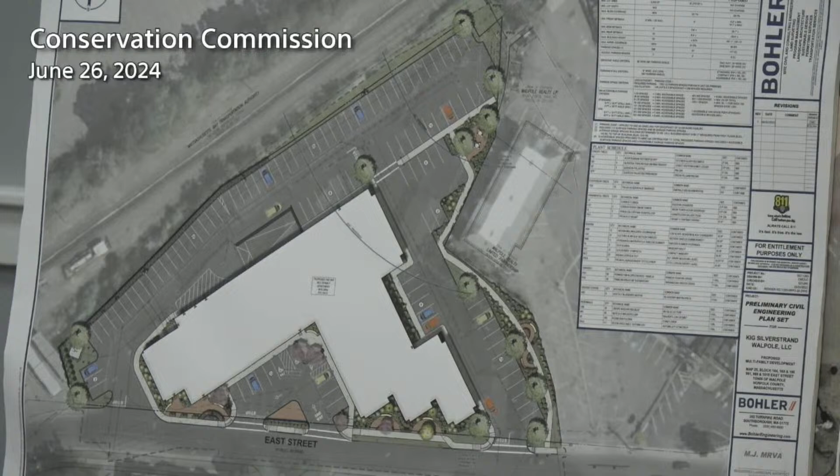Obviously, all the associated amenities go along with it, the parking, stormwater, all those things that would go along with a site plan like this. The stormwater system, it's notable that through the 40B process, it was peer-reviewed by multiple third-party engineers, Tetra Tech, who reviewed most of the civil components in the stormwater.

So we've responded to all their comments, revised, resubmitted, and the plans before you are the final, approved plans through the comprehensive permit. The stormwater is very closely looked at, but the high points of the stormwater system itself are that we're significantly decreasing the stormwater runoff rates and increasing the infiltration through this project.

Under existing conditions, the stormwater is collected through a catch basin and just outlets directly to the brook. There's no infiltration, it goes untreated. Under proposed conditions, we have typical stormwater catch basins with deep sump hoods.

Prior to infiltration, we have 4 oversized infiltration units throughout the property, so we're exceeding the town's requirement for the 1-inch water quality volume, and significantly going above and beyond what's needed from the state standards relative to infiltration, naturally meeting all the stormwater quality requirements from the state's perspective.

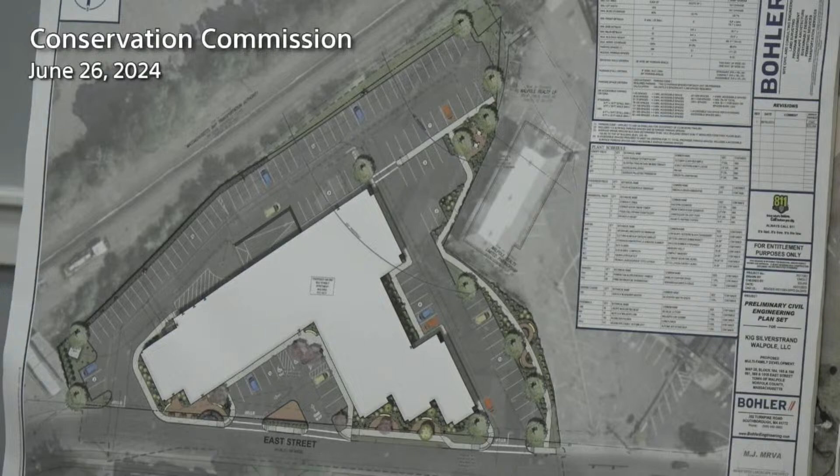That's really the high level. Obviously we're coming in under redevelopment regulations under the riverfront area, so there are certain requirements we need to meet. We failed to provide that in the notice of intent, so that was part of what DEP and the commission commented on, to provide that in the narrative. That's going to be part of our response to comments, but those requirements, we can effectively go through each one.

I don't know if you want me to go into detail, but overall, from our perspective on this redevelopment, the entirety of the riverfront area was previously disturbed or is currently degraded. The site's been around since the early 1900s, and sometime in the 1960s I believe the culvert was put in. As part of getting that built, most of that area was either filled to build up that wall and come in. The only part that's really unpaved would probably be fill from that area back then.

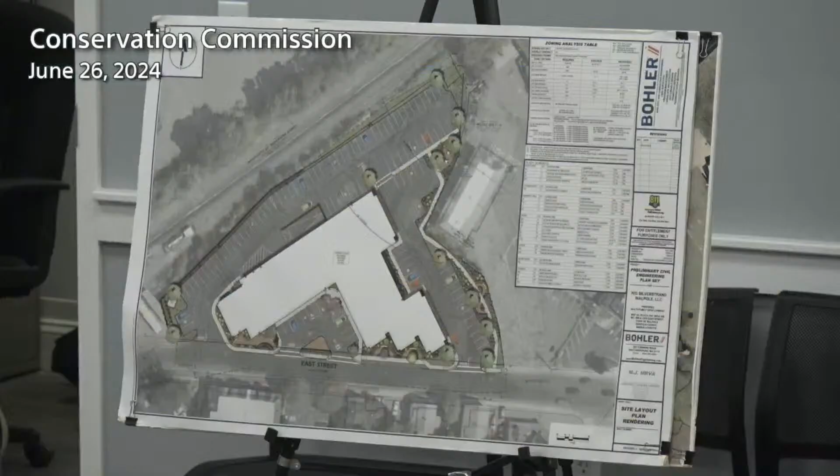It's our conclusion that it's fully degraded in the riverfront. We are providing an increase in pervious area, though only a couple hundred square feet, an additional couple hundred square feet of green space within the 100 to 0 foot of the resource area. We need to update our calculations because we provided the full area, believing the riverfront area to have been circled around. So all our calculations and reports were assuming this was the entirety of the riverfront. We need to update our calculations to reflect this, but what it will show and conclude is that there's a slight increase in green space as part of the project.

I'm sure I missed something, but I've been talking for long enough, so I'll turn it back to the chair and any questions we have.

Okay, did we have anything else here? Comments from any of the boards? No, we don't have any comments yet. Okay, we're expecting some, I'm sure Carl will submit something.

I did include in the file the Tetra Tech review letters. I've reviewed them myself, and they did review the stormwater, the infiltration units, the water quality inlet. I don't think it's necessary for the commission to peer review it, because it's already been peer reviewed by Tetra Tech. So we can just get a letter from Carl.

I would like them to address all the sections in 10.585, which is redevelopment of previously developed area, which they know they need to do. That was really my main comment. I included DEP's comment in my report.

Yeah, so your numbers will change. I was a little confused because your riverfront area on site was 23,742, but your total site was 22,900, while your alteration was 23,742. So that confused me a bit.

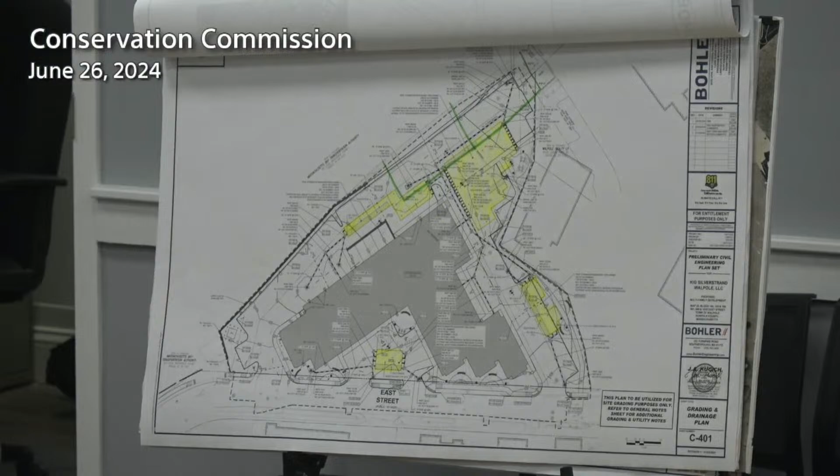Doug, did you say there's 5 or 6 infiltration basins? I believe there's 4 total. Would you mind showing them on there? I'm having a little trouble reading this on my copy. Flip to sheet C401, I don't know if you have plans in front of you. Yeah, there are large size plans too. I anticipated the comment, so I highlighted in yellow where those systems are on the site.

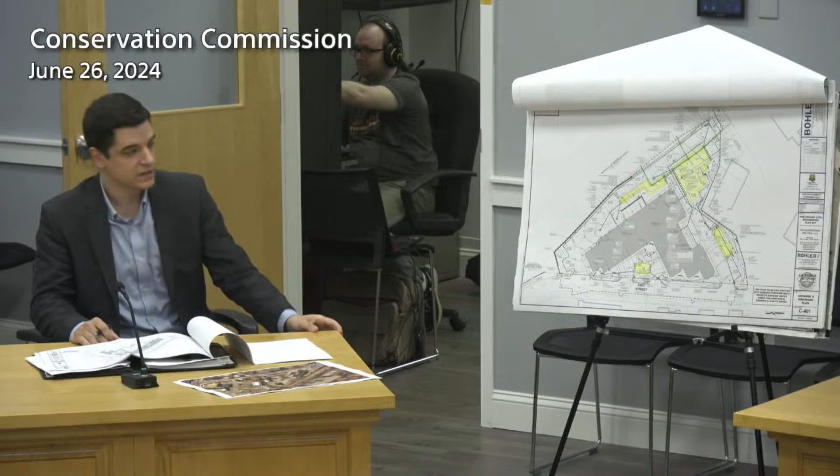And I see 12-inch PVC, high-density polyethylene piping. Does that connect the infiltration basins to each other? I don't know if I fully understand the comment, but each of the stormwater basins picks up certain areas of the property. So for instance, this one would collect the front and infiltrate on itself. Some of these are interconnected, and ultimately, if it overflowed beyond the 100-year storm, there's an existing piped connection out to the Spring Brook. It would overflow through that existing pipe.

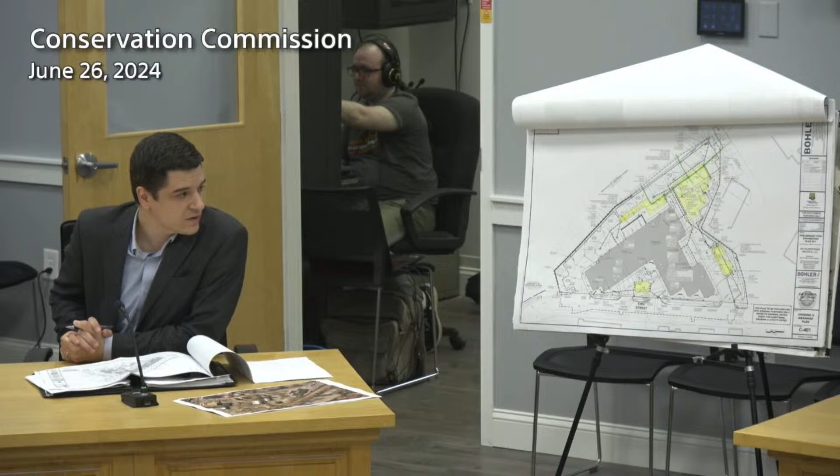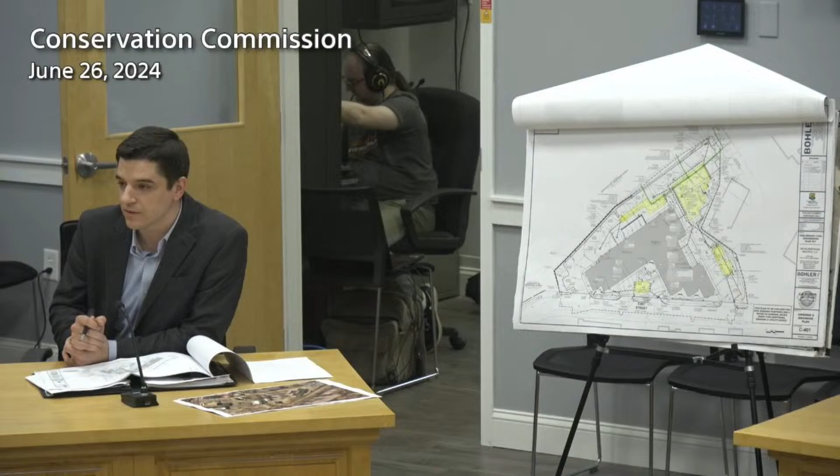And then snow removal, where would that be stored? This came up as part of the zoning board process, and I think what was agreed upon was that there's a snow management plan, but it's a narrative—if it's so many inches, or after 24 hours, it needs to be removed from the site, is my recollection, but I can come back with that information. It would be trucked away, if it gets to a point where it's in parking spaces or any issue, I can come back with that plan. I don't want to speak out of turn, but there is a plan in place.

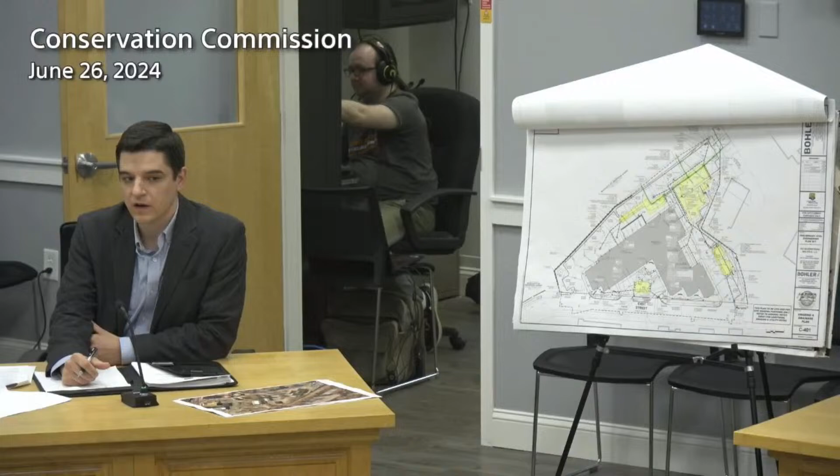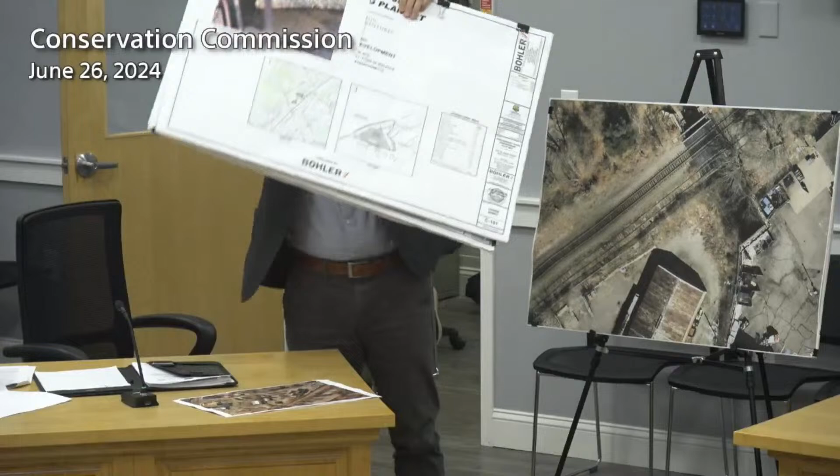Drainage right now on the site, you said it kind of stays on site right now? Still water, existing-wise? Yeah, existing, most of the site drains in, there's a couple of catch basins that eventually collect it. Most of the property kind of drains in, it's pretty much a bowl down to this point, and then there's an existing pipe connection from the catch basin out to the Spring Brook. Okay, turn this upside down on you to make it more challenging.

So it's untreated, it just goes right out? Yep. But the revised plan, your new plan, would be that it's caught on site and treated? Fully captured on site, a significant amount will be infiltrated up to the 100-year storm, so we're oversized to make sure we can infiltrate as much as possible. If anything beyond the 100-year storm makes its way out to the brook, by that point it's been treated—it's either been infiltrated, or it's just overflow. That's obviously an improvement over the existing condition. Very, very much so.

That's all I've got. Al? Well, for starters, I'd like to know how far away from this property, marked in yellow, the Neponset River is where it crosses East Street. How far away is that? I don't know that answer. Because that's where the Neponset River crosses East Street, and I want to know how far that is.

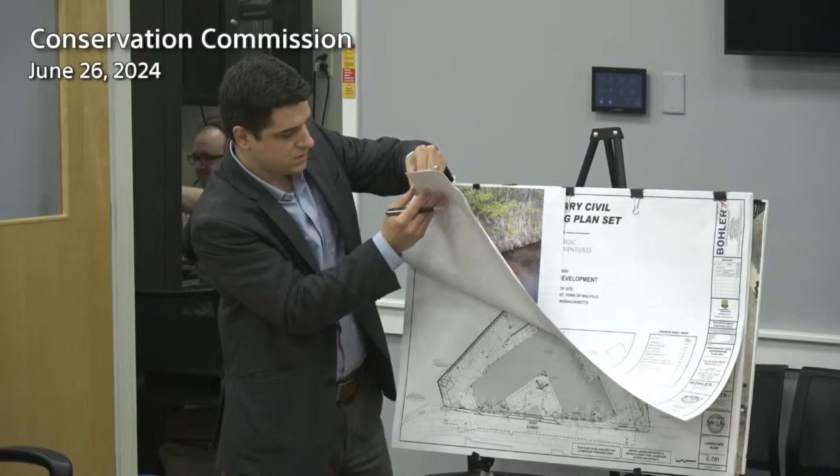What's your elevation? Have you got something that shows the elevation between that? The Springbrook comes out with a head wall and then goes into the Neponset, right? Yeah, so the grading plan has all the elevations on it. What sheet are you looking at? We're going to go to sheet C301... 501, sorry, 501.

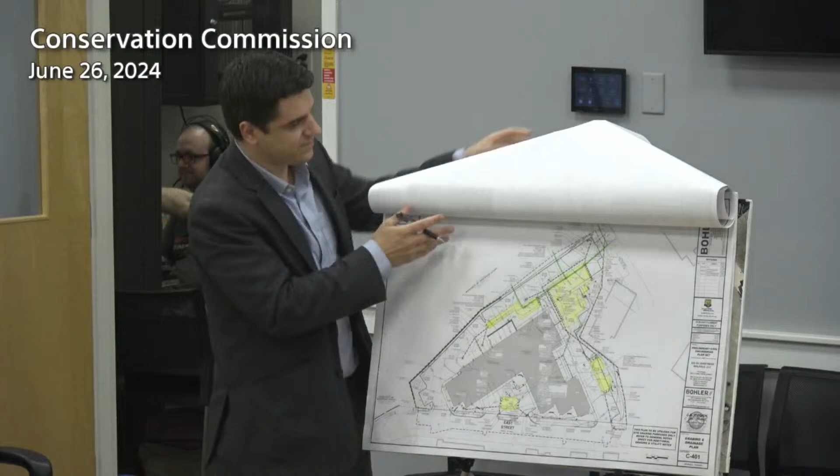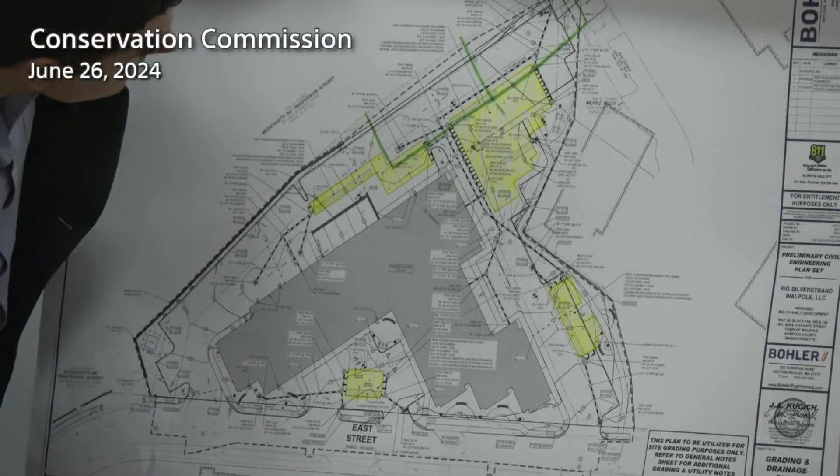Oh no, it's not, it's sheet 401. 401? Sorry, okay. So you got—those are wetland flags. We got an elevation there. Yeah, so the top of wall is about 130... it was 139, the top of wall. Where is—our site sits at 137. Where does it show that? That little triangle, the contours that stick out? I see the 140 contour. Where's your top of wall?

Top of wall and the culvert. What sheet is that? This is the existing condition plan, that would be at the very back. This is by other plan, that would be the very last sheet.

Top of wall variance between 139 and 142.

Details on the last sheet, so it's the existing conditions? 703. I thought existing conditions was one of the first sheets. What is this sheet? Lighting.

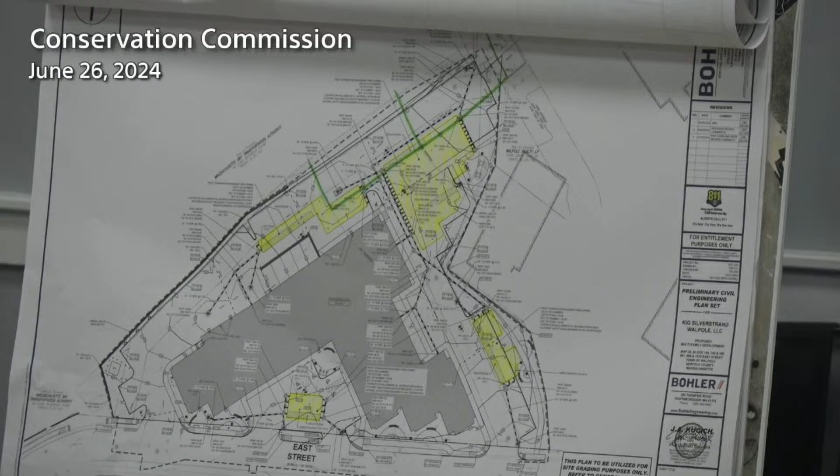Those are under, okay, correct. So if it did flood, it would make it into the catch basins and into there. Okay, all right. Anything beyond the 100-year storm would be catastrophic, and everyone's underwater at that point.

So Jack, can I just make a remark as far as what Al's saying, as far as the improvement to the riverfront area, that it may be an improvement if you move one of your landscape areas, or more landscaping, closer to the river.

So this little triangle that's closest to the river that's on your property, what is that gonna be? Is that... you have a triangular piece that kind of sticks out at the end of the property. At the end of the parking lot you have two trees, and then beyond the pavement there's just a pointy triangle area of the property.

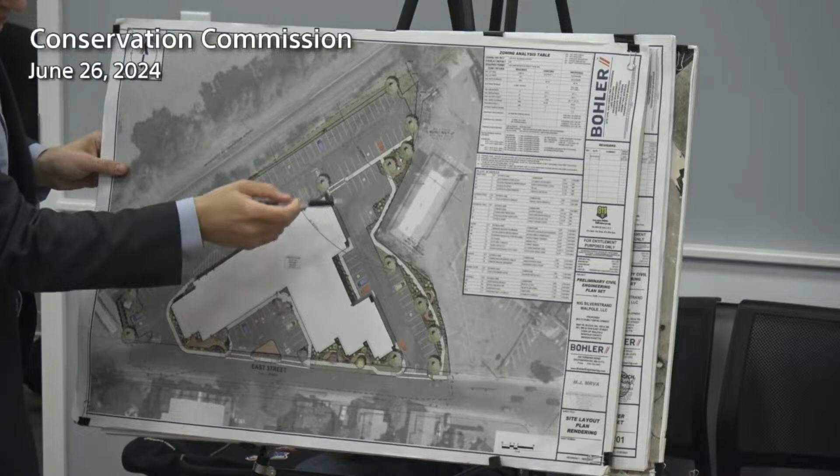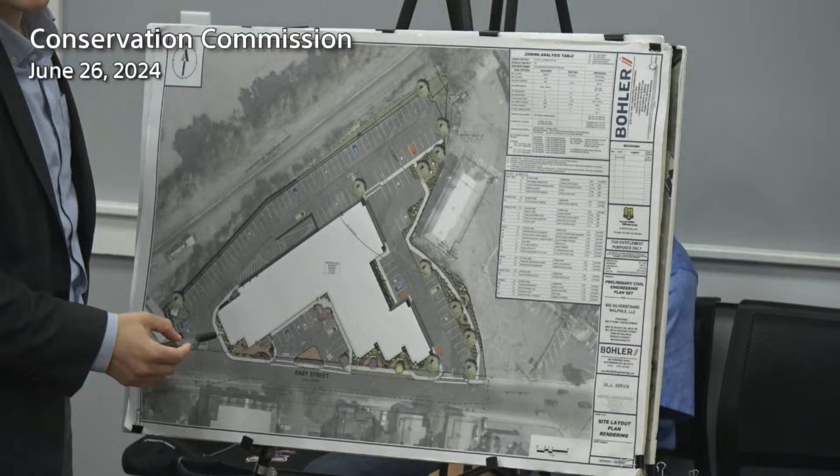So here, you have the end of your parking lot, and then there's this, and the river is here. So what is this gonna be?

So it could be that you put another couple of trees there, some more shrubs, or some kind of enhancement to the riverfront area closest to the river. I think that's a great idea.

Right now, we're not proposing to do anything, but I don't have a better photo than this. Essentially what's in here right now is, I believe, fill material from when they built the culvert and backfilled it. Over the course of 50 plus years, it just revegetated through that material. The wetland report calls out some invasive and some non-invasive species, but the client would definitely be willing to go clean that area up.

An invasive species removal is always a good thing along the river. And to do some more plantings close, at your end of the parking lot, maybe within that triangle, would be a benefit to the river.

Do you think so, Al? Al, to do more planting closer to the river, at the end of their parking area? You see where it is? Where the land is going, this triangle, right there. So that would be beneficial to have that.

We were here two weeks ago for the prior hearing, and at that time, one of the more important pieces of information we'd yet to receive were Carl's peer review comments. We have still yet to get his official letter, but Landis and I met with him the Monday following our last hearing. He gave mostly compliments, but his biggest item of concern was in regards to the fire lane that circulates the rear of the building, from the entrance from Route 1 all the way to the southeastern corner of the site.

It's going to be two-way traffic with access to the parking spaces and the garage bays, but along the rear it's going to be single-lane traffic. We have signage and striping showing that. Previously, in our original submission, in an attempt to reduce the amount of impervious surface we were generating on site, we had the fire truck movement plans, and we got to work with a 12-foot wide fire lane along the back, at its narrowest. So what we ended up doing was expanding that to 20 feet.

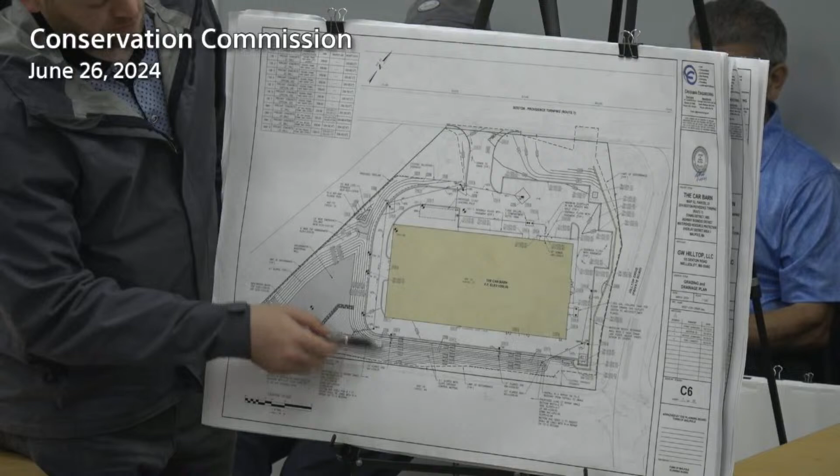We updated our fire truck turning template to provide an additional buffer and movement width adjacent to the fire truck turn. Fortunately, when we reran the calculations and analysis, we concluded that the added impervious area from widening the fire lane did not impact the pond's capacity. At the time of the original design, prior to adding that additional impervious area, we still had almost 10,000 cubic feet of excess storage during the 100-year storm event. Widening the fire lane generated about an additional 1,700 square feet of pavement along the south and southeast corners of the site, the rear, and there was still adequate separation prior to the 100-year peak ponding elevation even reaching the spillway, leaving the site.

At the last hearing, too, there were also a few other questions and comments about the plantings. I spoke with our landscape architect, and she assured me that what she proposed is drought-resistant, also very hardy plants to resist the colder temperature times of the year.

One comment that unintentionally did not get included in the revised plan set was a detail of the wall, but verbally, the applicant's committed to putting in an Allen block wall. There's definitely not going to be any riprap slope going up from the east side of the property.

I'll be over in this direction here where we're going to be doing our more significant cuts. I think it's about a 7-foot cut at its peak, where we are closest to Hilltop. We're going to be putting in an Allen block wall all along the rear here.

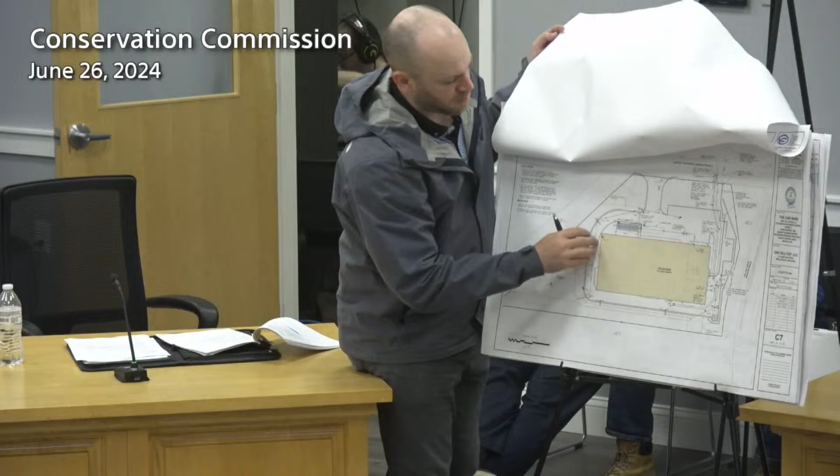Because we were able to demonstrate that we were able to retain everything on site from the proposed impervious and capture everything upstream off-site solely within this area here, we wanted to avoid the added cost of putting in an underground system elsewhere.

During the original design of the project, which kicked off almost a year ago, one of the issues we had was how can we reduce construction costs to make it feasible to the applicant? And we had initially had a much larger building and a much larger impervious footprint.

In order to mitigate stormwater effectively, we had to include an underground system in addition to the stormwater pond. And so after many iterations of shrinking the building and reducing the impervious area, we came up with this concept, and it worked. That's why we're presenting that today.

Okay, so based on the conversation with Carl and Chris, I felt like we really went over pretty much everything that was necessary. And then he had to do some slight redesigning because of the fire road, but it didn't really impact his stormwater design that much.

I think Carl just went on vacation this week, so he was probably just running around doing everything before leaving. He did indicate he was happy with the system, so I told Chris, why don't you come back and we'll go to closing the hearing and having the commission render a decision rather than continuing it again, because I don't think it's necessary. It still has to go to site plan review with the planning board, so if there's anything that needs to be tweaked and he has to come back, he can just do a revision to us.

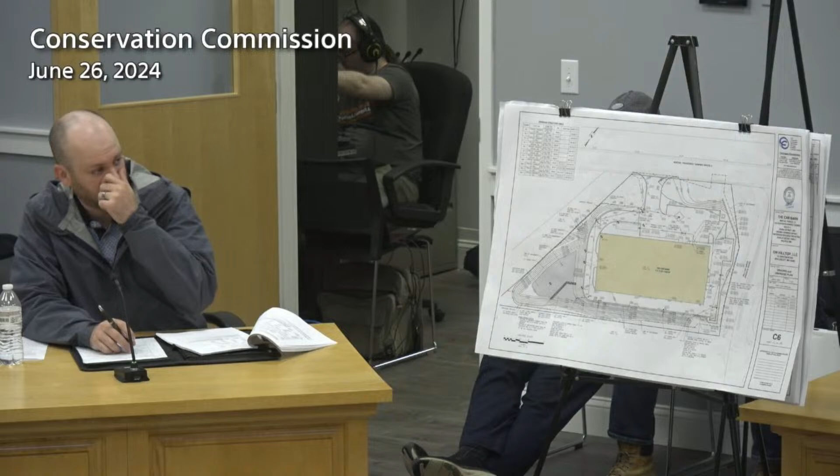Doug, any questions or comments? I think I got this figured out. The septic tank is below pavement, but the leaching field is not, correct. The proposed leaching field location is going to be in an area that's just flat grass. And we will have to submit an application to the Board of Health for the permitting of that. Yeah, that was the only thing I had.

Media? Al? I see you have the septic system is... you can't connect to the sewer?

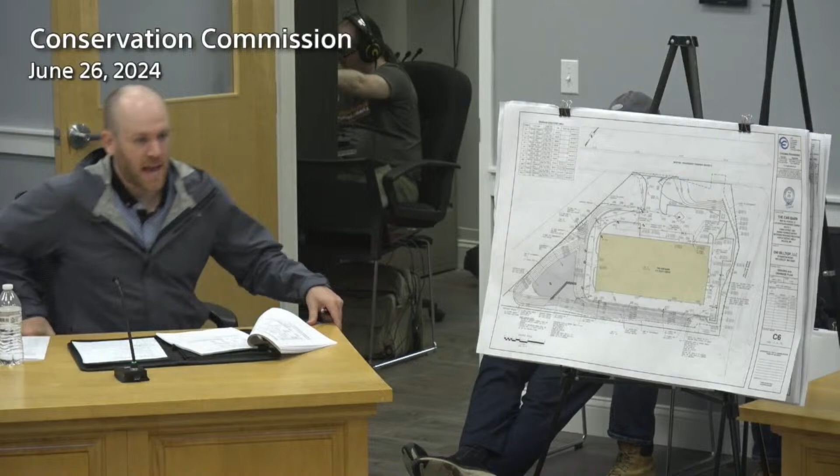So sewer is not available, but there's sewer adjacent to the site. At the northeast corner of the site, there's the intersection of Hilltop and Sunset, but the sewer system is actually a private system, so we don't have the right to connect into it. The applicant reached out to the owner at the Preserve Park, and they didn't even want to have a conversation about it with us. So here we are with the septic system, which is a lot more expensive to construct and maintain than a grinder pump and a 2-inch sewer force main going about 50 feet to the sewer right there. I think that's where the town sewer line is near there.

I think the town sewer is at the next intersection further up Route 1. The Preserve Park has its own, I think 1 or 2 of their own private sewer pump stations. So what we would pump to our site would then go into their pump station, and I think they just didn't want to entertain that at all. I'm sure the applicant was willing to pay to make that connection, but it was out of our control, unfortunately.

Okay, good. Anyone in the audience have any questions or comments, please identify yourself for the record.

Jack: what is a private sewer system? I believe it's probably collected and then pumped into the town system. So it's all retained within private property. The system itself exists solely on private property until it's pumped into the town's right of way.

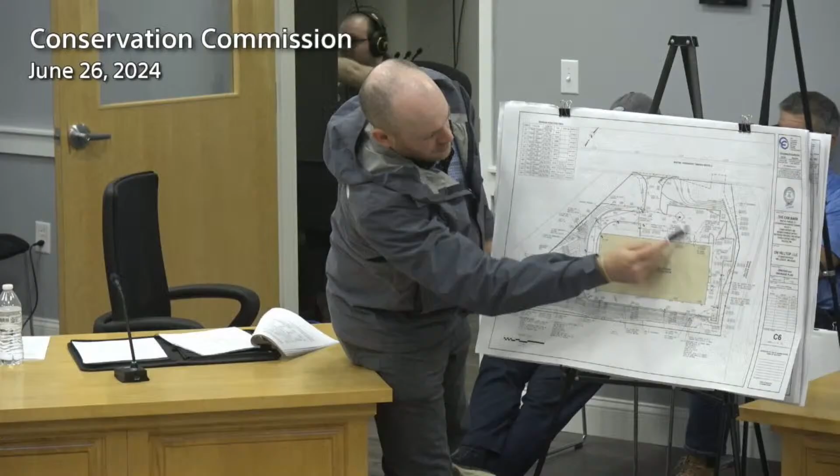No one else? Jack, go ahead, another question. So I see the 1,500-gallon septic tank on the north side, oh, this one right here? Yeah, well I'm getting to the one on the east side, there's the 1,000-gallon holding tank for floor drains on the east side, and it says it has no outlet. What happens to the water that flows in there?

So the building will have floor drains in it for when cars come in and out with snow melt. They'll be doing light hand cleaning, probably like a slop sink, a rag, and some residential grade polishing wax. So any water that drains off the car while it's inside the facility will be able to drain into the floor drains, and then by gravity fall into the holding tank, which is essentially just like a tight tank. Once the water level in the tank reaches a certain elevation, an alarm system will go off and notify the owner or operations manager that the tank needs to be pumped.

So a company would come pump it. And it's really just snow melt, water, miscellaneous—you pull into your own garage, the snow melt comes off—that kind of low volume amount of water that would enter the tank.

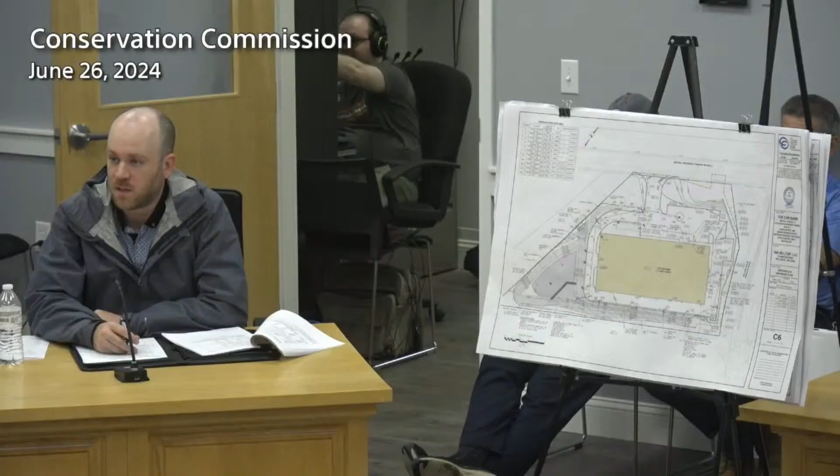So it vents to the ridge line. If they fail to pump it in time, I assume the water would come out the vent? The vent will go to the roof line, but that's not like a tank that's really going to be getting any flow from any toilets, sinks, or anything like that. It's just for washing vehicles. It's a plumbing code thing, if you have floor drains and don't have access to tie into the sewer, so unfortunately we have to tie that in.

We actually did the design and permitting of the project on the other side of Hilltop, Dry-X, and they have that same sort of configuration with the sinks and toilets connecting to the septic system, but they have floor drains that have to go into a tight tank. So across the street, very similar, identical situation.

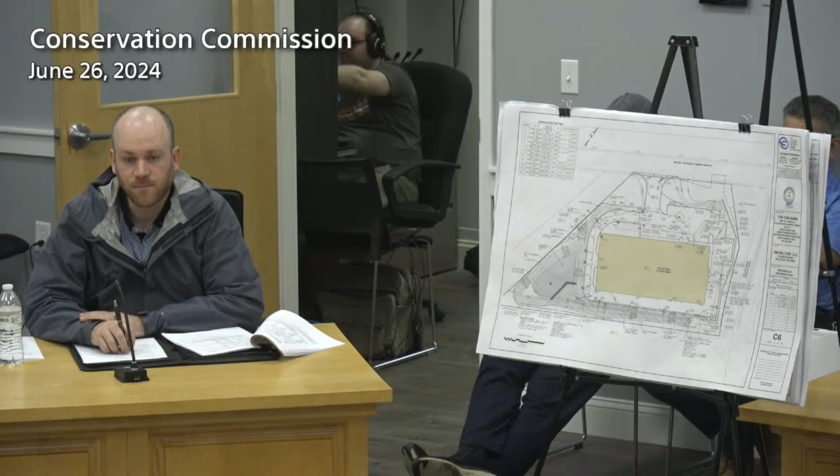Okay, someone make a motion to close the hearing? So moved. Second? All in favor? Aye. 4-0-0.

Standard conditions, yeah. I would just add to receive the detail of the wall, and the approval of the septic system anywhere. Yes.

Okay, so someone want to make that a motion as noted? So moved. Second? All in favor? Aye. 4-0-0. Thank you very much. Okay, thank you.

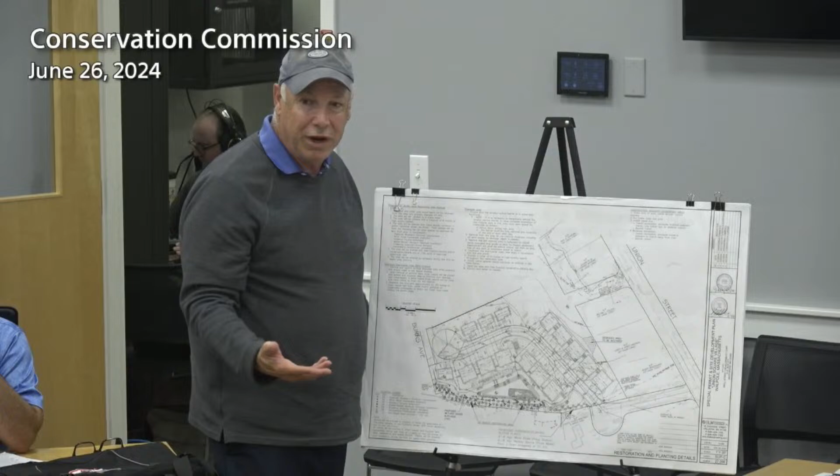So I was saying, if you wanna plant something, I would plant it somewhere in here where it's gonna be undisturbed riverfront, because right in here you're actually in somebody's backyard. But that should be undisturbed riverfront area anyway. If you go there now, you'll see these people have been dumping their branches and debris. That all has to be cleaned out.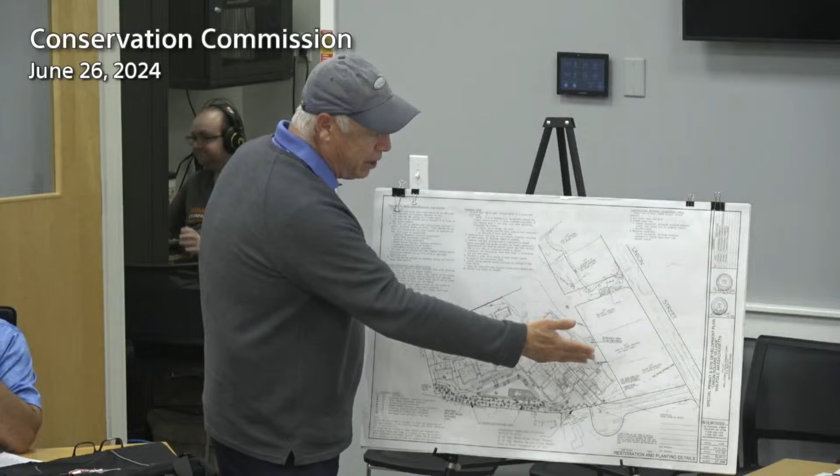I'm just making a suggestion that you may want to not put it exactly in the same place. Why don't you go look and make it the location of these shrubs.

Whatever we're calling this, a replacement shrubbery, that it be in conjunction with consultation with the agent, at the discretion of the agent. I would say place them in the same place. We can take a look at it. I think some of it might make sense elsewhere, or additional ones.

Okay, anything else, anybody? I think so. Okay, so we'll make that a motion to include that in the order. So moved. Second. All in favor? Aye. Aye.

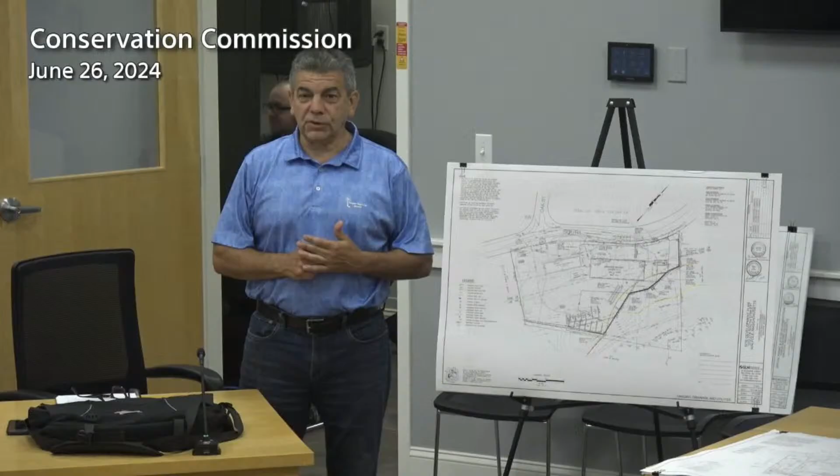I'll go over it with you. Okay, why don't you bring it forward, because you only gave me two plans. Want me to come up there? Let's bring it closer here. Yeah, if you want to share that with Al, maybe.

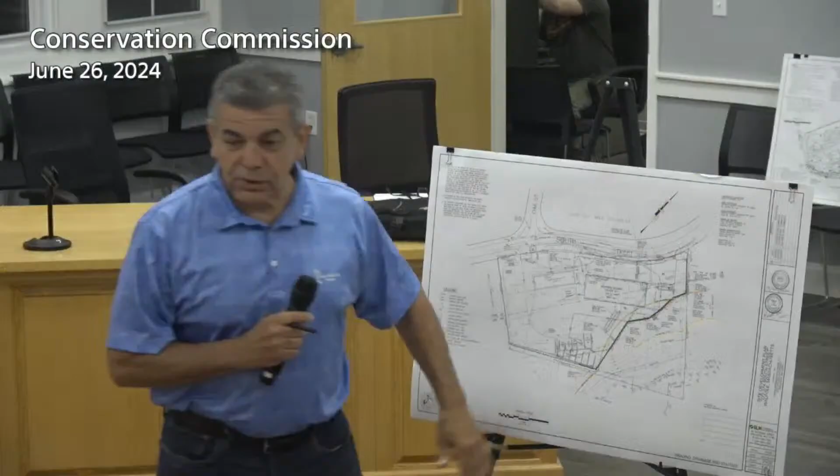What sheet are you looking at there? That's the approved plan. I have the other one, the proposed. So I'm going to go over the approved and the proposed with you, so you can see them both. I'm showing sheet 4.

Before I forget, they have to sign the order for Brookline too. Don't forget that. Hold on, first things first. Wish I had another easel. Have you identify yourself for the commission? I'm waiting for him to sign. More for the audience.

Okay, we are on TV, so yes, we need to consider the audience. Okay. So you're talking about what sheet? Sheet 4.

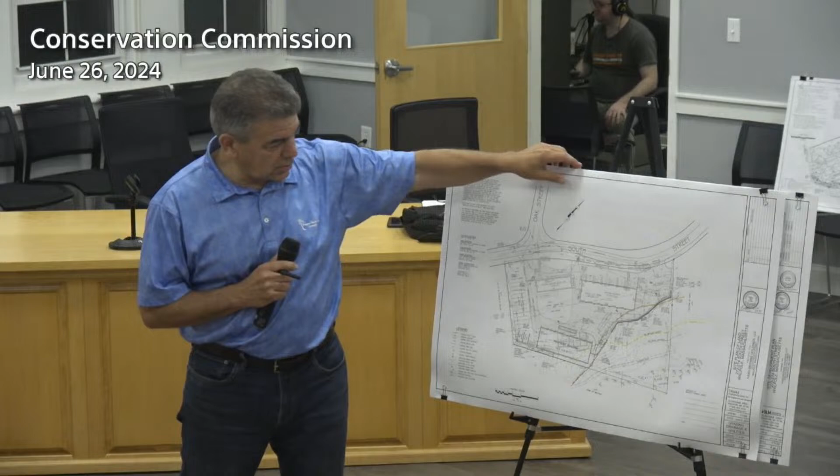For the record, Rob Truax, Truax Engineering Group. This is Ian Brown's project at 272, 274 South Street.

We have a current order of conditions to build this plan, which is the proposed building, 10,500 square feet, and some work in the parking lot. About 80-85% of this work is complete, as you know. He hasn't done the striping, but the wall is all built, the building's in, it's occupied. He hasn't done the work out back. So if you look at this plan, everything pretty much from here forward, other than the striping, is complete.

He has not redone the storage bins, so these are still sitting right here. He didn't move them back here as we proposed. So this is the limit of work. It comes down and over across the site. This is your 200-foot riparian that was on the site. This is the 100-foot wetland buffer in yellow.

So what he's proposing is a third building now. The third building's going to go right here in the back where those bins were I just pointed out. So the limit of work doesn't change. This is still the limit of work that was on the other plan. The difference is that we're putting in a building where there was pavement rather than having the bins in the parking lot.

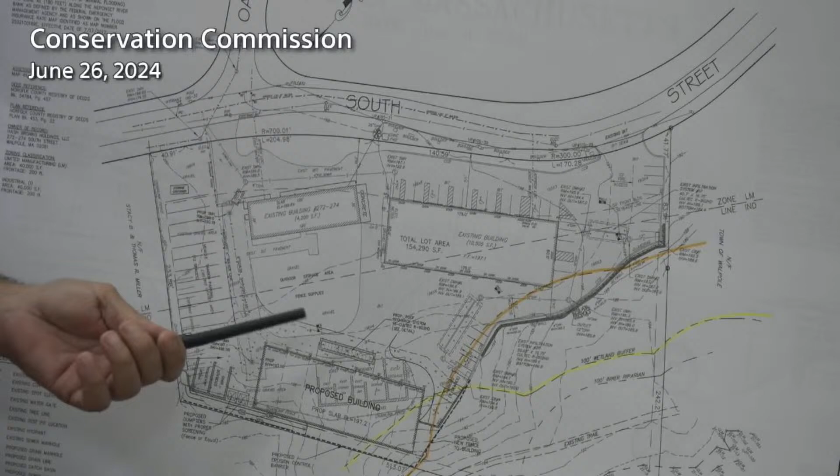So to some extent, this is actually going to be a little bit of an improvement because we're going to have the roof here and we're going to recharge the roof. We've designed a recharge system to mitigate up to the 100-year storm event for that roof area. So we're getting more recharge on the site than we were before. I went out and did some test pits over here with Carl. He met me on the site.

We talked about this drainage system and just collecting the roof. So we're decreasing the drainage considerably more than what it was from the approved plan, because we're providing more recharge for the impervious surface that's on the site.

So the building's in the 100-foot right here. And then this is the limit. The pavement will stop halfway up the building right here before it came down to the corner. And there's going to be a couple bins way over here, which is outside the 100-foot buffer. And then the dumpsters are going to go over here in the corner. This is still going to be his access road. This is all just outside storage.

So the site's really not changing. He does have, this is pretty much occupied by tenants now with storage outside. There's stuff in these bins. They're being utilized. And so we still have an open order. So I guess the question is...

Is it a minor modification or major modification? Can we approve it as a minor, or do we need to do a new public hearing and amend the order? Do we amend the order if we do a new public hearing, Landis? So you don't issue a new one, right? If we decide it's major, we do a new hearing?

How's the process work? A minor would be reflected in the as-built. A major would be an amended order of conditions, which we would have to advertise and do a new hearing. So I guess we're asking the commission what they would prefer. It would still be the same order, just an amendment, but it does require a public hearing. So I guess we're asking you what your preference would be, what you think.

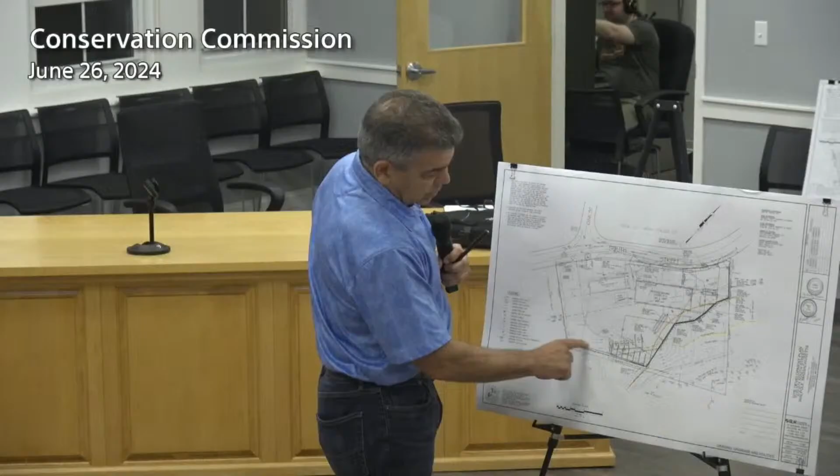Well, this is actually paved back here. This was all going to be paved. This was all pavement. These bins are all paved inside. The pavement, this was going to be a wall, and it came right to the corner. So that was all going to get paved. This was gravel, so your stormwater calculations took into account that whole back area being paved, impervious.

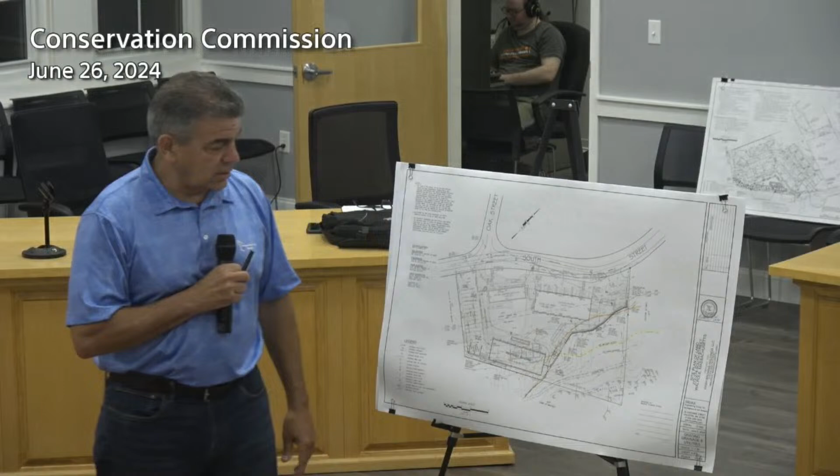So when I did my original calcs, I looked at all the gravel as impervious because it's been run over for so many years. That's how Kyle and I discussed it in the beginning. But now I'm adding infiltration. Most of that water was going to the drainage system - there's a high point, some drained off site into the catch basin and recharge system. So now we're adding more recharge - this whole roof will go into the new recharge system, and less water will go to the old one. But at the end of the day, we're recharging a lot more than before.

And it's easy to recharge the roof, because it's clean. This is slab - it's a slab.

It's a mirror image, the same exact building plan. I think there's a land disturbance permit needed for this - it's a necessary permit too, so it would be an amendment to the land disturbance permit. I think it affects the wetlands permit not that much.

It's up to you guys, I don't really have a preference either way. That was good advice. We would prefer it to be minor - obviously it's simpler if we go forward that way.

What's the size? Doug, any questions? Not at this time. What's it gonna be used for? He rents them out - these are all bays with garage doors, like contractor bays. This building's all rented. He has about a third himself, and the rest are rented. The other building, the existing one, is rented out now too, where he used to be.

So there'll be 8 bays - is it 8 or 10? Let me count... 7 maybe? Yeah, 7. But these are 60 feet long based on the scale - same as 60 by 175. Various uses - most of the guys are there now. There's landscapers, a fence guy, I think a sprinkler guy in one of the bays.